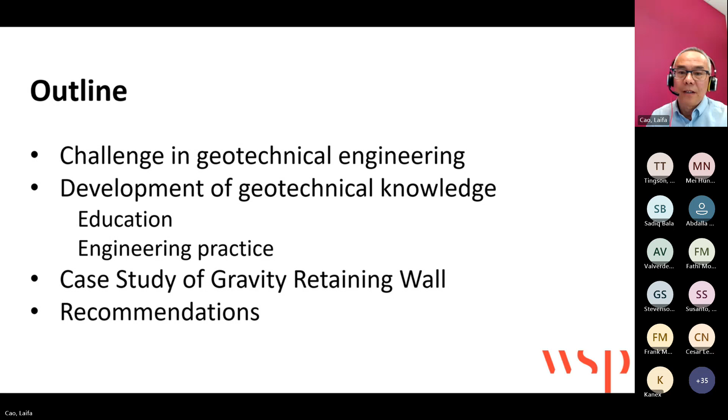As we know, geotechnical engineering is a very special career compared to structural engineering or civil engineering. The reason behind that is because the ground, we know, has huge variation. Then we need to talk about the soil, rock, and the groundwater.

For example, I'll take one cross section from a recent project in downtown Toronto. You can see this is for a railway station design. We have the fill material, it is for the abutment. Then below the abutment, outside of the railway abutment, we drilled boreholes. The borehole spacing is only 30 to 50 meters.

Then you can see the variation of the soil. In this case, the fill material can range from 0.5 meter to 4 meters. Then we have the local sandy soil, with thickness also varying from 1 meter to 4 meters. Below, you have the clay material. Even the clay thickness varies hugely, for example from 3 meters to 7 meters. Also, the elevation of this clay material varies.

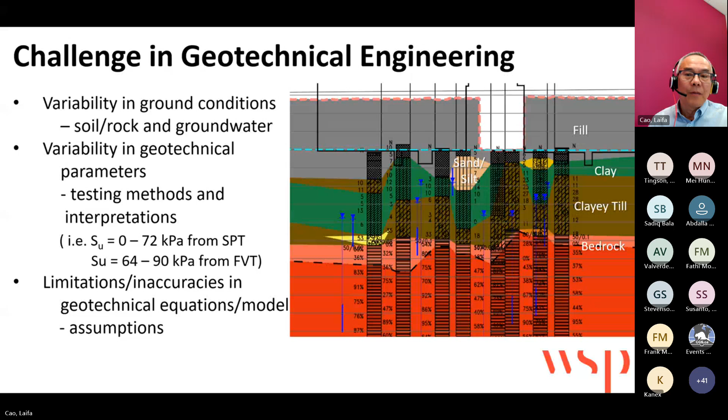How do we build our geotechnical knowledge? Of course, you have to attend university lectures or attend seminars, workshops, and do self-learning from textbooks, manuals, and codes.

In my opinion, another most important thing that is very often ignored: the local authority also has its own regulations. For that, when you do any project, you must know what the local regulation requirements are. That is very important. Sometimes if you didn't follow the local regulation, there could be additional claims or lawsuits. For example, as I know, in one project in the Toronto area...

The city of Toronto has its own regulation for pavement design - they have a specific thickness type of pavement design. If you didn't follow that regulation, even if theoretically the material works, if you didn't follow the regulation, the contractor can sue us as the geotechnical engineer because our recommendation didn't follow the local regulation.

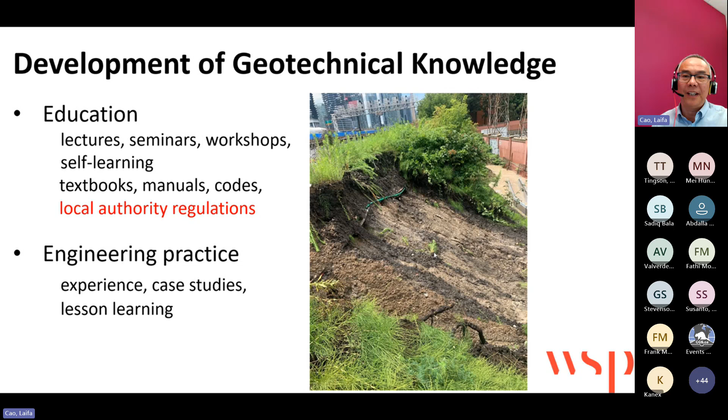Okay, today I try to review one project, what we in essence can be learning from this project. This project is the construction of the roadway bridge of CN Rail Line in Ontario. The geotechnical investigation was done in 2006, when four boreholes were drilled. Following the geotechnical investigation, we have the construction of the embankment and the retaining wall.

The height of the retaining wall ranges from 2.8 meters over the existing embankment, to 7.8 meters on one side, because that side doesn't have enough space. So then they needed a design for the retaining wall.

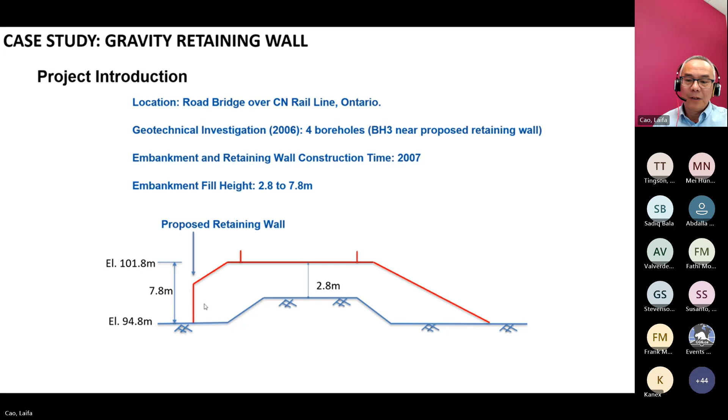From the geotechnical investigation, you can find what the soil is. For this side, we have loose to compact sandy silt fill. Below the loose sandy fill, you have a very stiff to hard clay till. Then, most importantly, you have one layer of soft to firm clay. From the penetrometer, the undrained strength range is only 20 to 40 kPa. Even though the SPT N value is from 6 to 24, which would suggest it is firm to stiff, the actual undrained strength is quite low.

Below, of course, in this location we always have this hard or very dense glacial till, where the SPT N value is greater than 50. For this retaining wall, construction is on the very stiff to hard silty clay till, and also the groundwater is quite low.

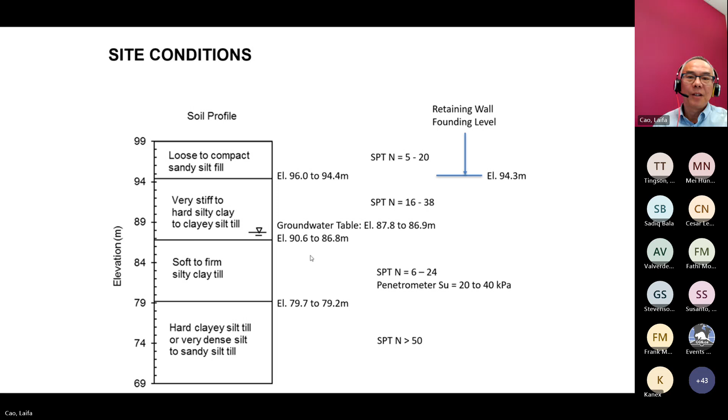Based on this borehole information, the geotechnical report is prepared. They also give design parameters for the retaining wall design. For example, they have a friction angle - if you look at this friction angle, it is only 30 degrees, not too high, correct? Then they also give the soil unit weight only 20. It is also not too high. Normally for the glacial till, the unit weight could be more than 20.

Based on that, they also provide the coefficient of earth pressure for design vertical wall. They use 0.4. That value is between the active earth pressure coefficient and the coefficient of earth pressure at rest, 0.4. That value is also not too high - need to be conservative. However, they don't consider if this backfill is not horizontal, it is sloped. Of course, that parameter could be too low.

They also give the passive earth pressure coefficient for the fill, 2, then native soil 3, corresponding to 30 degrees. They also give the sliding factor. Based on this borehole information, they recommend the soil bearing capacity is 200 kPa in SLS along with 25 millimeter settlement. Of course, in that geotechnical report, they didn't do the settlement analysis.

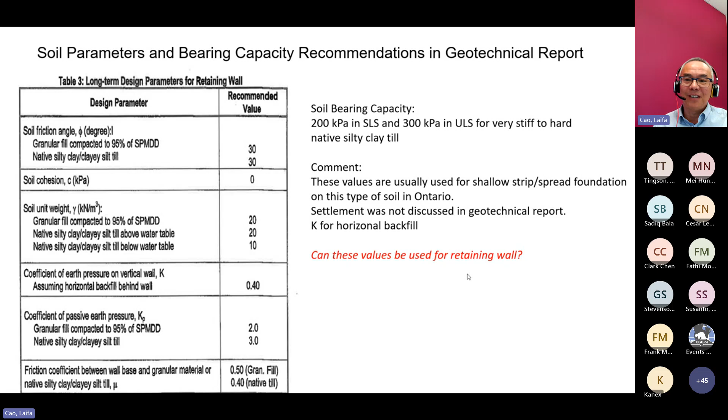They just assumed 300 kPa in ULS for this retaining wall founded on very stiff to hard silty clay till. That value is normally reasonable if it's a recommendation for a shallow strip or spread foundation - most geotechnical reports recommend this value for shallow foundation design. However, is this value also applicable to a retaining wall? No, of course not. That's why this wall has this issue.

Based on that, the structural engineer designed the gravity wall for this section at this site. You can see for the gravity wall design, they use a height of 6 meters, then a width of 4 meters - the width divided by height is about more than 60%. For most gravity walls, that design also looks okay.

However, they didn't consider that you have a 1 to 2 slope behind this wall. So then that wall's same design is not as conservative as we originally assumed, because you have the slope. If you have the slope, then the net earth pressure will be larger compared to if the ground surface is horizontal, correct? Because in the geotechnical report, they don't consider that there is a sloped surface behind this wall.

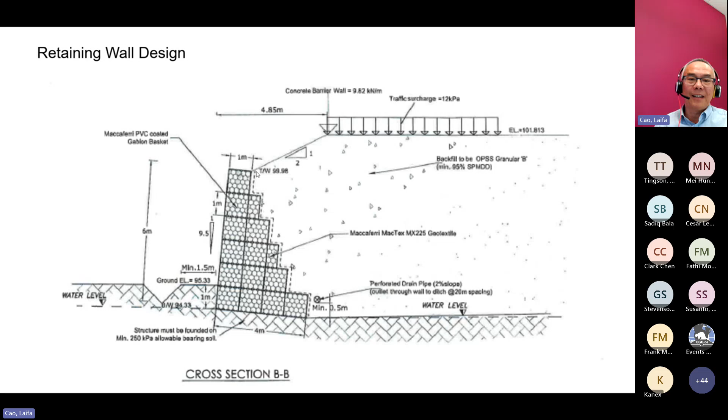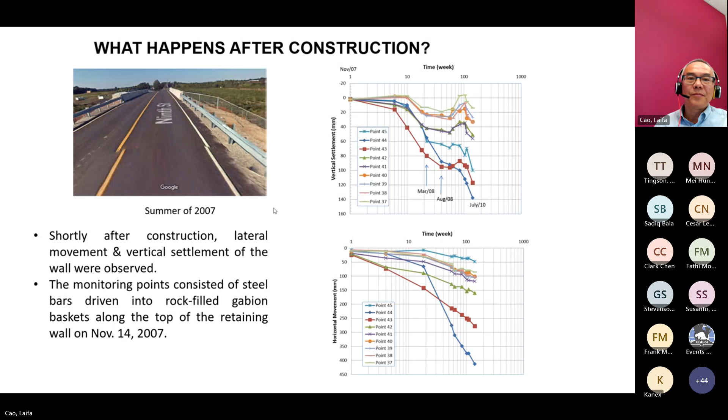Okay, then we have done the site investigation and observation in 2010, three years after construction. We took some photos and measured the retaining wall. You can see from here.

Then this wall damage already happened, correct? Local damage, cracking already happened, and the soil becomes loose. Also for the highest wall, you can see this originally the wall design is inclined, not vertical. But after three years, this fence already pushed away. You can see this becomes not vertical, even not vertical, correct?

Originally designed, they have the 1 to 7 inclination, but now this one is almost vertical, even pushing naturally against this fence. You don't have any gap between this fence and the wall. Originally, they have some gap.

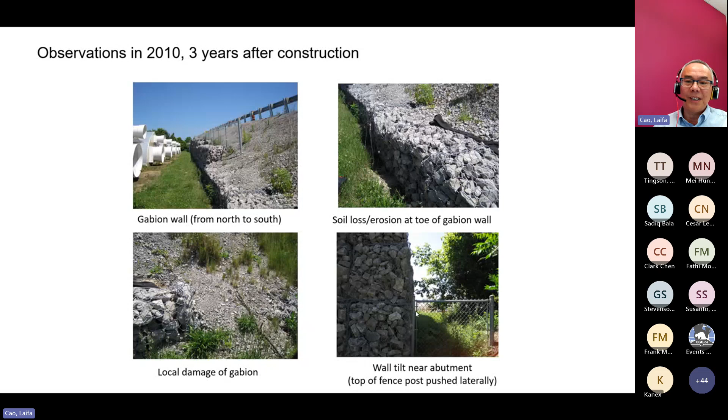Then also the surface, the pavement has cracks. The drainage channel has become damaged. That means the settlement is not uniform, correct? Because you see here, they have cracks in the subdrain pipe, already cracked. That means the settlement is not uniform. The highest settlement happens in the middle of this retaining wall.

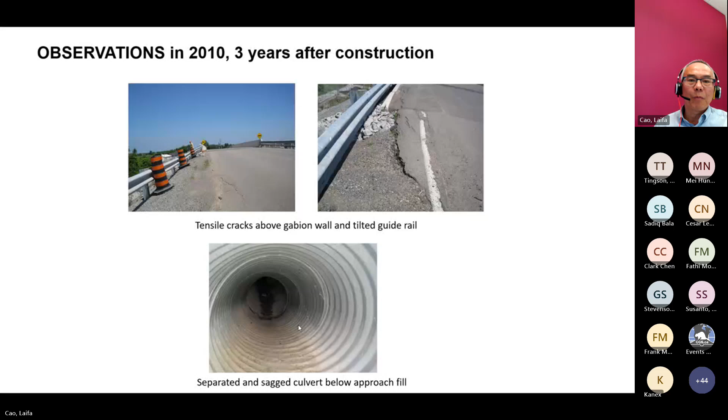Then after we measured this wall, we find for the highest one, the cracking already pushed out. Then also the design doesn't really follow the design drawing. The design drawing uses 1 to 2 slope, but actually it is 1 to 1.6 for the highest wall. That means maybe during the construction, there was no engineer monitoring the wall construction.

Then you can see this wall basically is already pushed away. The sliding resistance is not sufficient. Then they proposed the backfill return slope, which is also higher than the design. That's why the sliding resistance is not sufficient.

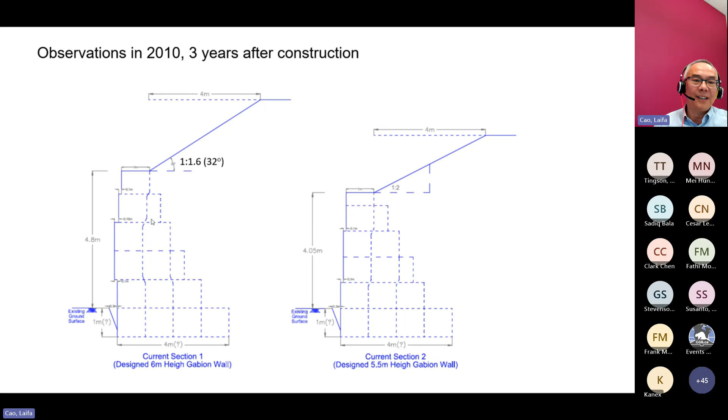For this 5.5 meter wall, we found that generally it is following the 1 to 2 slope, right? That is so. That means even though it needs to be pushed, basically there is not much damage. But for the highest wall, you can see some damage or sliding failure already happened.

For the gravity wall design, traditionally we use the working load design, but now we must follow the limit state design. For example, in the Canadian Foundation Manual published last year, they provided different factors for different failure modes. For base sliding, the typical resistance factor is 0.8. They also give a range: if you have more investigation done and a good understanding of the project, you can use a higher resistance factor, reaching 0.9. If you don't have good geotechnical investigation, then you need to use a lower factor, 0.7.

The second one is considering overturning. That means the active moment against the resistant moment has a factor of 0.5, ranging from 0.45 to 0.55. For checking the overturning, we also need to make sure the loading point eccentricity is within the base of the wall divided by 6.

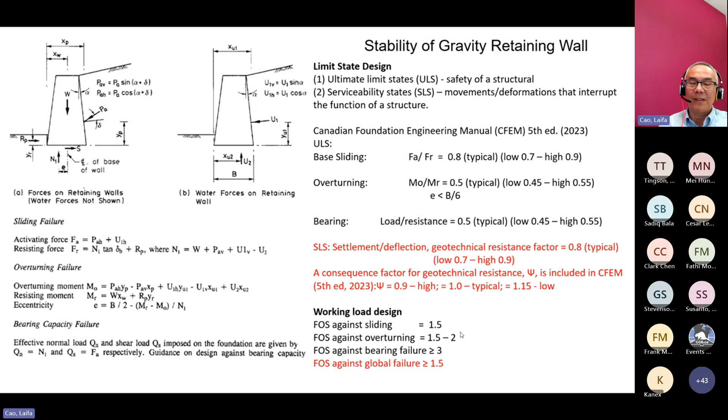Then for the retaining wall, most important is the bearing capacity. For the bearing capacity of the retaining wall, since you have the lateral earth pressure, you have other factors as well, not only the bearing factor, but also shape factor, inclination factor, tilt factor, and ground slope factor for the retaining wall construction. Most importantly, because you have the lateral earth pressure, this makes the bearing capacity for the retaining wall much smaller compared to a normal foundation.

If you don't account for it, for example, you can use this formula, but this factor for each lateral case, different people could give different values. But most importantly, you need to remember when calculating the bearing capacity of the retaining wall, you need to consider the lateral load impact. If you don't consider the lateral load impact, of course you will get a higher bearing capacity.

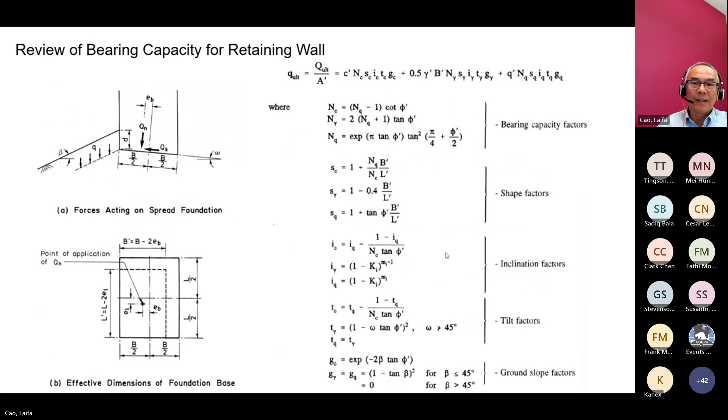Here, then we check what is the bearing capacity for this wall, using the previous formula, considering what is the groundwater level at different elevations. For example, if we use the original report, we find the average working load is 212 kPa. But the actual working load is different, ranging from 120 to 180, correct?

Then considering different groundwater levels, you also find the admissible bearing capacity is different. Based on what groundwater level you assume, and what height, you can get different values. For example, the original report requires ULS 300, then SLS they recommend 200. But the average working load already is 212, which is greater than your SLS bearing capacity.

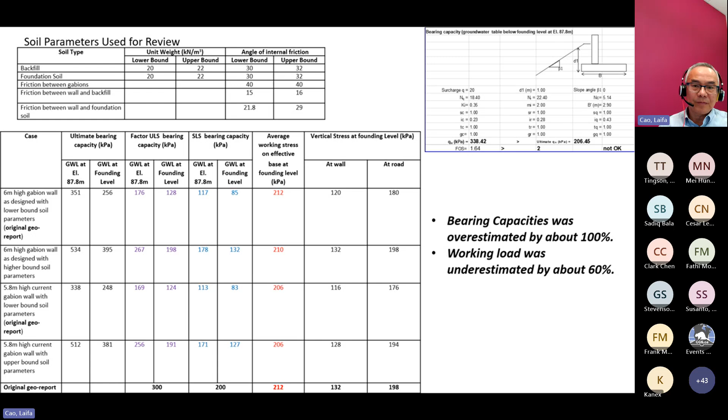Then we also can check what is sliding, overturning, and global stability. For all of the cases, we find for overturning, if we use the working load design requirement of 2, but basically for different water levels and heights, we find 1.7 to 1.8, which is marginally okay. However, if you use limit state design, limit state 0.5 is equivalent to 2, so this wall is a little bit under-designed for overturning.

For sliding, if we use the 1.5 working load design requirement, for most of them, especially the highest wall, we find it cannot reach 1.5. That's why you find that sliding has already happened. Especially one case, it is only 1.15, close to 1. That's why sliding could happen.

Then regarding global stability, that wall design is also less than 1.5, because in all the cases the global stability factor of safety is less than 1.5. You can use some software to easily work out what the global stability is. For this wall, we know this design is under-designed for sliding, and also under-designed for global stability.

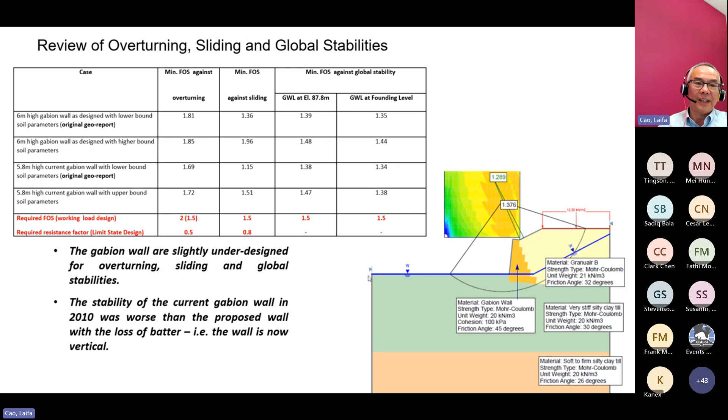The most important thing for this project is that since they have one layer of soft clay, it could have a long-term settlement issue. For that project, the original geotechnical report didn't have enough time to do this settlement analysis. But my opinion is that for a foundation or retaining wall constructed on soft clay, especially where there's a long-term consolidation issue, we need to do the settlement analysis.

Sometimes we don't have enough budget to conduct geotechnical laboratory testing, for example an oedometer test or one-dimensional consolidation test. What you can do is try to get some parameters from a textbook or from a design manual, like a foundation design manual.

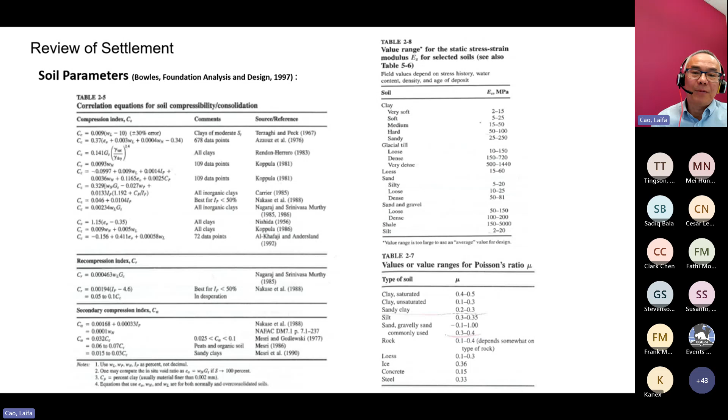For example, if you take Bowles' foundation design manual, they have some typical consolidation parameters - compression index Cc, recompression index Cr for the normally consolidated stage and overconsolidated stage, and secondary compression index. For sandy soil, they also provide elastic modulus and Poisson's ratio. You can still find reference soil parameters from a textbook or design manual if you don't have the budget for laboratory testing.

Another way is to try to collect parameters from local projects. For example, for Ontario glacial till, I tried to summarize what the unit weight is, what the water content is, and correlate that to SPT N-value. What is the friction angle? Then also compare parameters like SPT N-value to the correlation between elastic modulus for clay material or sandy material. You can see that sometimes you can still find a good relationship.

For example, for unit weight, it always reduces with increased water content - that's reasonable, because if water content is higher, you definitely have a lower unit weight. For glacial till, sometimes we find the unit weight is much higher than traditional normal soil. You can see if water content is 15, the unit weight is roughly 21 to even 23.5 - it's high, correct, for glacial till.

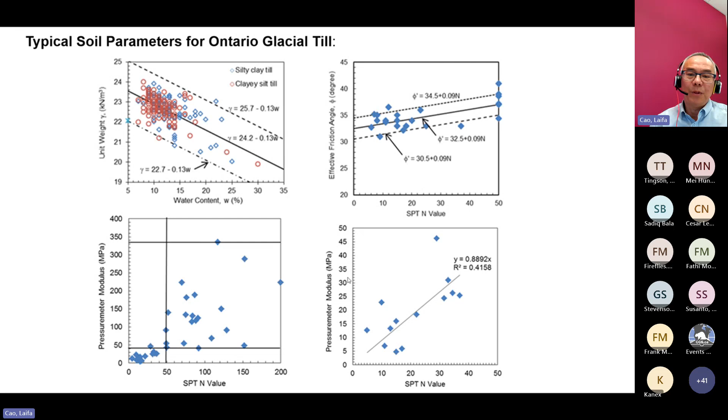The friction angle is also quite high - the minimum is already 31 even when SPT N-value is only 10, and the highest could reach 40. The elastic modulus is also quite high compared to normal soil - sometimes even when SPT N-value is only 10, the modulus can reach 25. Of course that's not a perfect relationship, but the trend is there: when you have a higher SPT N-value, the elastic modulus generally is higher.

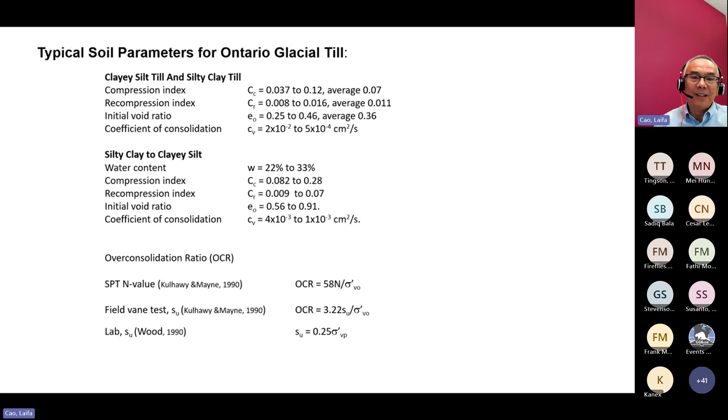Okay, for this project we can do some settlement analysis. Currently we have another software - for example, you can use Slide, Settle3D, or even finite element analysis. Once you use the soil parameters based on your local experience and add them to the software, you can easily come up with what the settlement is for this project.

For example, I tried to compare the predicted value and the measurement, and I found that this value is quite consistent. The measurement is from 100 to 120 to 140, then the prediction is roughly about 125 - you see the trend is quite close. That means even if you don't have the budget to do laboratory tests, if you try to compare the local soil parameters, you can still get a good result, and at least you have some range of the settlement.

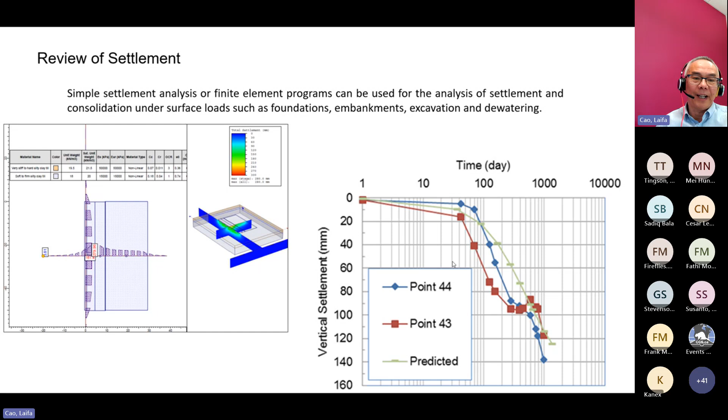You could make this wall wider, or add reinforcement behind the retaining wall, or make the vertical load distribution spread over a bigger area, or do some soil improvement. Another way is preloading, if time allows. So how do we modify or improve this wall? You can give different options - for example use soil nailing, reconstruct the wall using geogrid, or try to reduce the vertical load using lightweight material. Finally, you can also do nothing, but keep maintenance.

For this case, the decision was to do nothing but continue monitoring. You can see that after a few years, near this wall we still encountered cracking, because the original design had a factor of safety that was too low. That's why this wall continued to deform.

But the most important thing is that here, they don't have any buildings, only some farmland. That's why they just keep continue monitoring, because it could be more economical.

The client needs to realize that the wall could still settle another 100 millimeters until the clay is fully saturated, fully consolidated, and the loading of this environment stabilizes. They also need to keep resurfacing the pavement for this road.

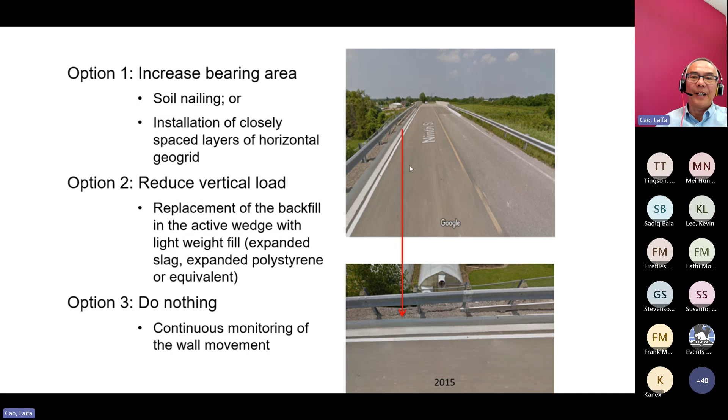So what is the lesson from here? I think a big lesson is that for the retaining wall, you always need to consider the working pressure on the retaining wall - it is higher than the vertical pressure because you have a lateral earth pressure contribution. If during the geotechnical investigation you don't have time for detailed analysis, you can assume the working pressure could be 150 to 200 percent of the vertical load. For example, if the vertical load for a 4-meter retaining wall is 80 kPa, on top of this wall it will reach 120 to 160, increased because of the lateral earth pressure.

The second point for bearing capacity in retaining wall design - most important, you need to consider the lateral earth pressure, rather than just ignoring it. That means for bearing capacity, without considering the lateral earth pressure, maybe you'd assume it is 200. However, if you consider the lateral earth pressure, maybe only 100 kPa, you need to make some deduction.

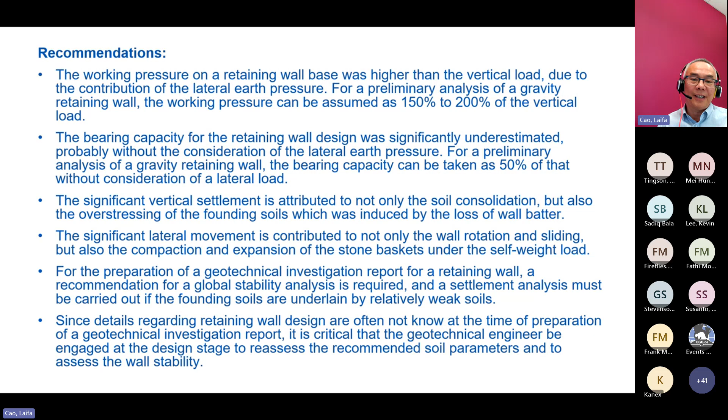But for geotechnical engineers, sometimes when we prepare the geotechnical report, the retaining wall design hasn't been completed yet. What should we do? We need to mention in our geotechnical report that the drawing must be reviewed by the geotechnical engineer, to make sure the geotechnical engineer's recommendations are added into the design drawing. Another thing is to review the construction drawing, to make sure construction has good quality control.

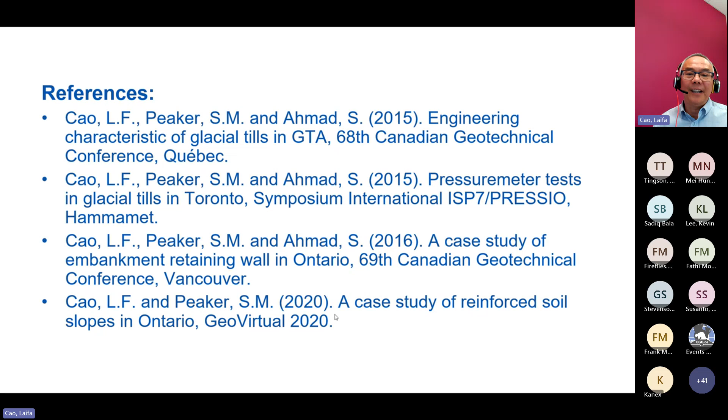I have prepared a paper on this case study for the Canadian annual conference. If you are interested, you can go to the Canadian Geotechnical Society website, and from there you can find the paper. Not only me, but I believe every year other geotechnical engineers prepare publications and case studies for young engineers. It's good to go there, learn from previous case studies, and gain more experience.